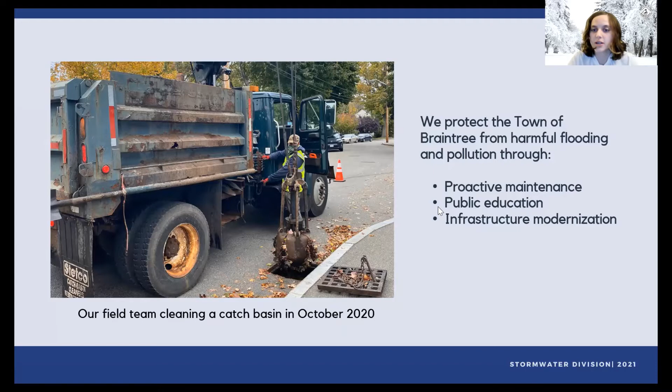So getting into our public education point, stormwater runoff contains non-point source pollution, and that's why as a division, we think a lot about pollution, not just flooding. So what is non-point source pollution? Non-point source pollution is the type of pollution that is created from everyday activities, such as walking the dog and washing your car, and all of these things can accumulate from suburban environments, urban environments, and even cropland to pollute rivers.

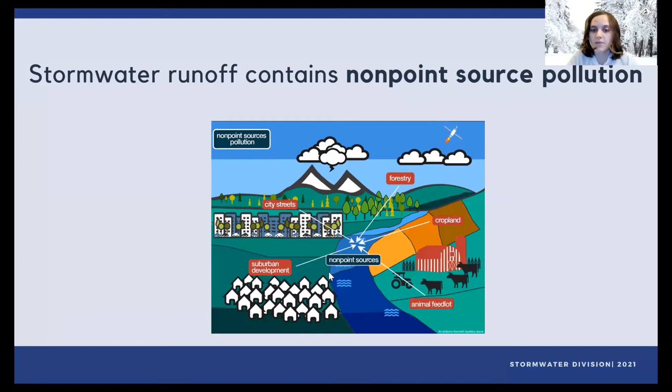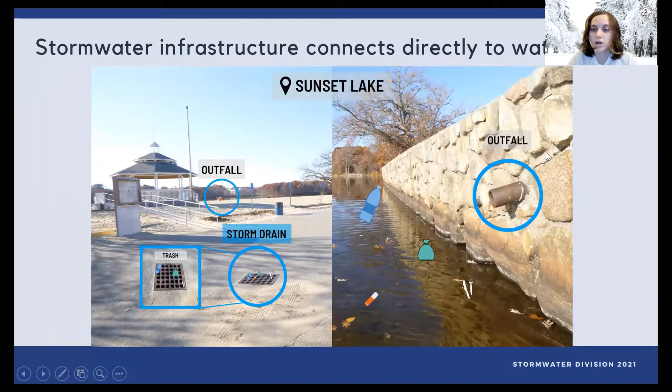So Braintree water bodies fail state water quality standards. We're definitely not alone in this. Many cities and municipalities across the state have this issue, but that's one reason why we're trying to address the stormwater runoff pollution, because it is the main reason that we're failing these standards. And that's true for the Charles River watershed, that's true all across the country, and that's why it's so important to address these issues.

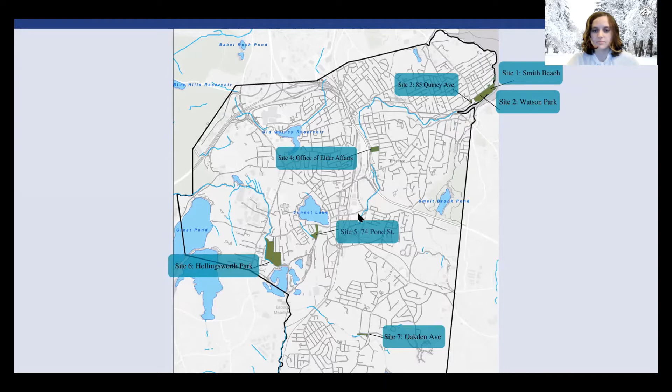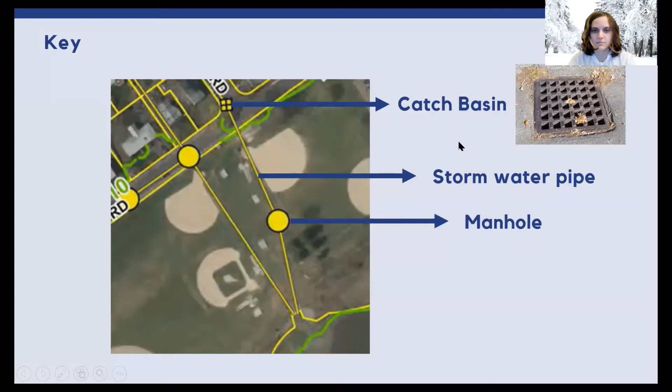So site one is Smith's Beach. And this site is a combination of the beach itself and the parking area that's across the street from the Metropolitan Yacht Club. Next slide, please. So on the map here, you see the beach itself along Edgehill Road and Vinedale Road, and the parking lot that's across the street from the Metropolitan Yacht Club.

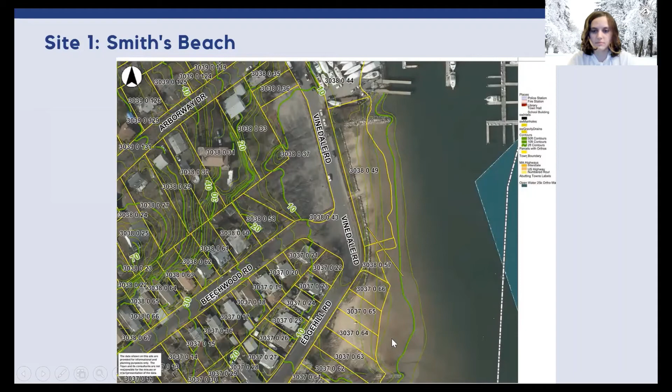If you look very carefully, you can see areas where there's some erosion into the river itself. So down at the bottom of the site, Madeline, I don't know if you can put your cursor there. That erosion is being caused by the outfall pipe that you saw in the next slide. We can go to the next slide. I could use those pictures as well. So the street drainage on Edgehill Road and on Vinedale go directly into drainage pipes that discharge onto the beach and are visible at low tide.

The idea here is to figure out a way to capture this stormwater and treat it before it enters the river, because this water is going directly into the river without treatment whatsoever. Next slide, please.

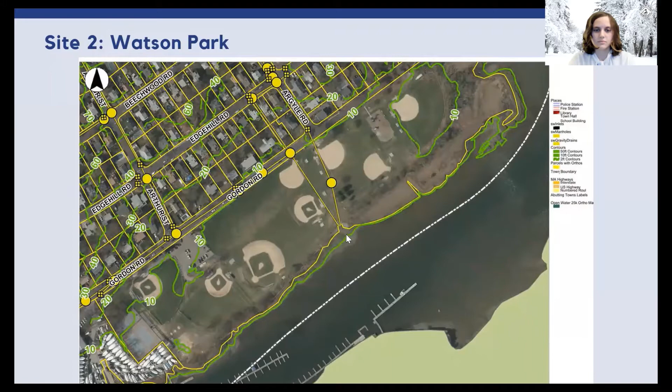So this site has 2 very large diameter pipes that go through the middle of the park, in between the ball fields, and they are part of a watershed that extends quite a ways up the hill to the north of the site. It's an almost 25-acre watershed that drains to these 2 pipes, and all of that water ends up right at the edge of the river. And if we go to the next slide, I can show you a couple of pictures of what the ends of those pipes look like.

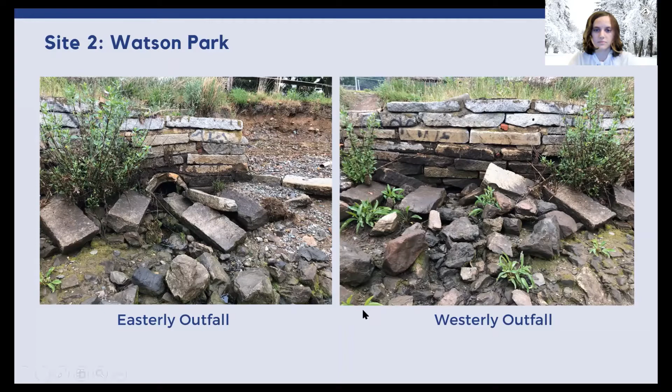Site 3 is 85 Quincy Ave. Next slide. As you see here, 85 Quincy Ave is the home of the DPW administration. Our division's offices are here. The DPW director's office is here. The engineering department is here. This building was a former branch library and has 2 stories with access on each story. So the parking lot adjacent to Gordon Road is on the high side of the site, and the parking lot in the back of the building closer to the yacht club is on the low side of the building. So there's a pretty significant grade change from the upper parking lot to the lower parking lot.

But unfortunately, there is no stormwater management of this paved area or of the roof at the present time. So the water that's generated by the pavement and the roof sheet drains across all the pavement from north to south, and then discharges across the steep slope that you see that separates this site from the yacht club itself. And then from there goes directly into the river.

There is a landscaped area on the western side of this site, which is available for a stormwater treatment best management practice. So we did do some soil testing there, and the soils do seem to be suitable for an infiltration solution, but we will see what happens with the conceptual designs when we get to that point. Next slide, please.

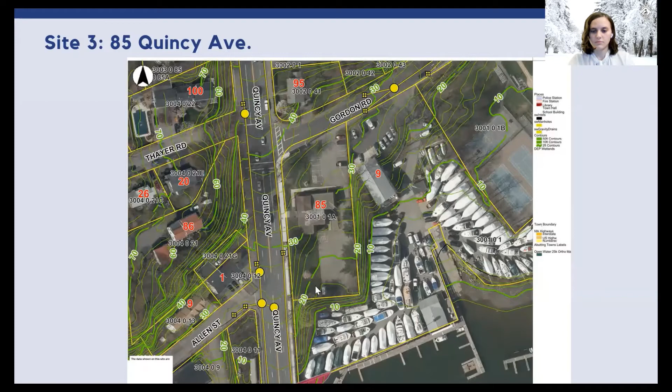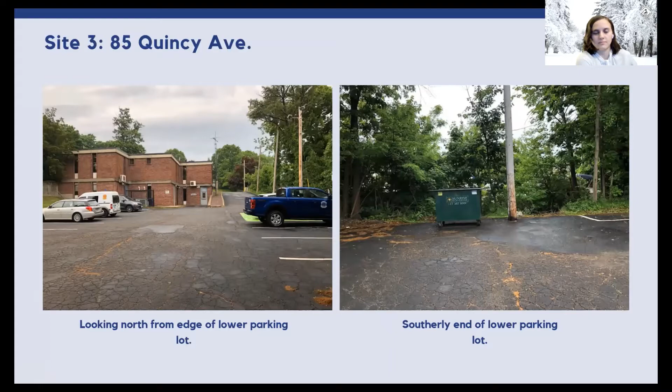The photograph on the left is looking north from the edge of the parking lot up the hill. So you can see where that grade change is on the right-hand side of the picture. The picture on the right is looking in the opposite direction. So you can see that there's a fairly steep slope there. All of the stormwater flows across the pavement and over the edge of that slope right now. Next slide.

Site number 4 is the Office of Elder Affairs on Cleveland Avenue. Next slide. On this map, you see the original building that was on the site. Since the time that this picture was taken, this is a 2019 aerial photograph, an addition was built to the building that actually encroached on the outfield of the existing ball field. So that ball field is no longer in use.

The town is planning to expand the parking lot for this facility because it does get a lot of use. And there is a conveniently located drainage line that goes through the center of the site. Again, you can see the yellow circles for drain manholes and the catch basin, and that's a drainage pipe that goes through the middle of the site.

So we have good access to the existing drainage system for a stormwater solution on this site. What you don't see on this map just off to the west is the Monatiquot River. At the bottom of the slope on the left-hand side of the site is the river itself. This drainage system that goes through the middle of the site, including some additional stormwater structures on Harrison Avenue, discharges directly to the Monatiquot. We would be intercepting this line and installing some sort of stormwater management solution in the landscaped area.

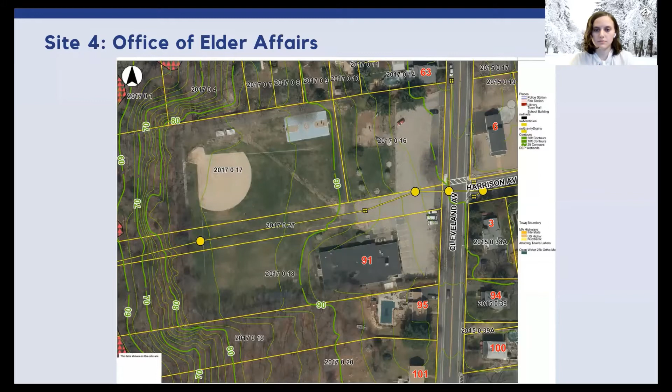These are a couple of photographs of the existing parking lot adjacent to the playground area. The upper right-hand side is a view down the center of the site where you saw that drainage pipe and a group of manholes. The grassed area on the lower right-hand side has a manhole cover in the center, which is the last structure in the line. So we may be making a connection to that manhole.

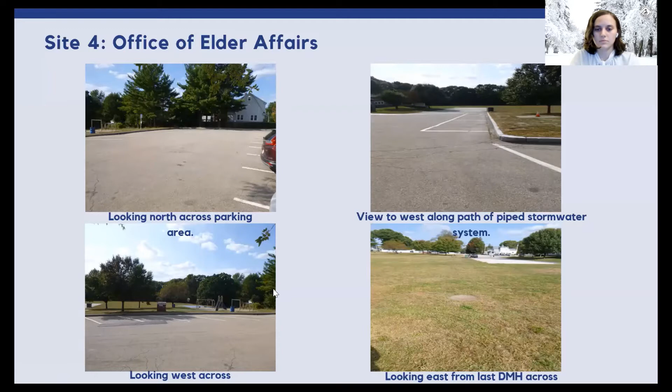Site number 5 is 74 Pond Street.

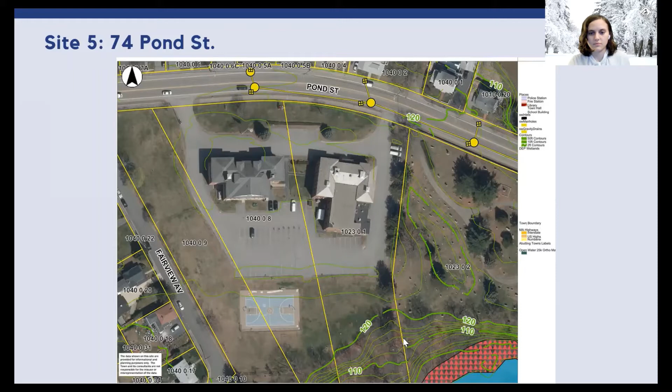Here on the left, you see the back of 74 Pond Street and the edge of the parking lot where the 2 catch basins are located. The center photograph shows the existing basketball court, and if you look carefully, there's an old swing set in the picture as well. The photograph on the right is the landscaped area that might be the location for a stormwater solution for this site.

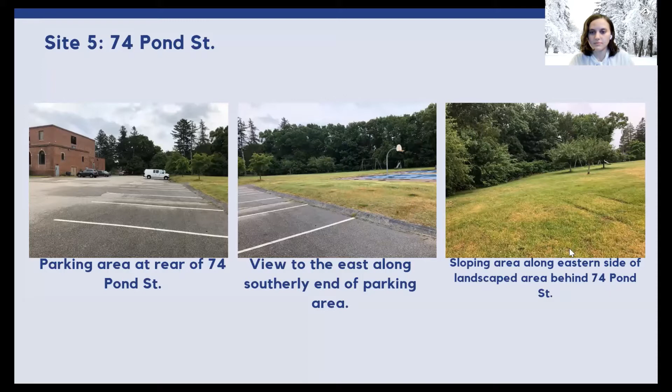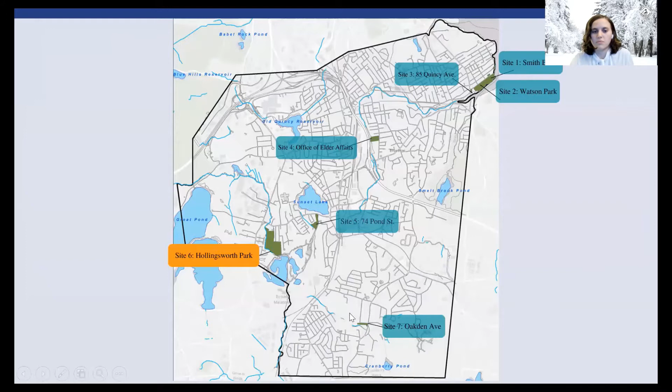Site number 6 is Hollingsworth Park, which is home to the Braintree American Little League - the other large area of baseball fields on the western side of town.

Hollingsworth Park is a long, narrow parcel with a fair amount of impervious surface because there are parking lots adjacent to most of the ball fields. But other than the tree box filter installed about a year ago near the beginning of the site, there really is no stormwater management.

The site starts out at a fairly high elevation and goes down and down as you get to the 2 lower fields at the bottom. The water from the parking lot flows down the driveway, takes an abrupt left-hand turn, and discharges onto another piece of town-owned property adjacent to the ball field - that undeveloped wooded area that most of you might have noticed if going to games at the lower 2 fields. Next slide, please.

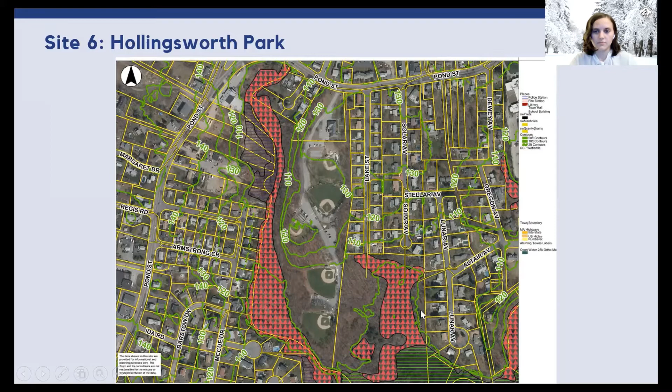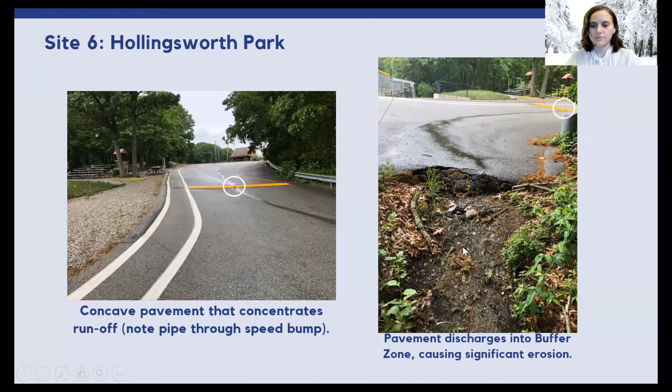The other element of this site is that there are a group of residential streets that also discharge stormwater into the same undeveloped parcel that's next to Hollingsworth Park.

Our hope is that we could come up with a solution that might collect and treat the stormwater from both the park and from the discharge point off Lake Street. I'm not sure if this is going to be possible because there is a significant wetland area on the parcel adjacent to the park. We have done a wetland delineation, so our consultant is aware of where the wetland boundary might be, and we will be working outside of the resource areas on our design solutions for this site.

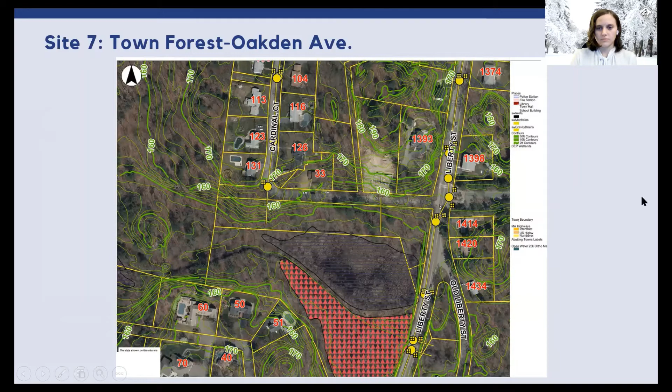That brook is a tributary to the Richardi Reservoir, which is one of our public water supply areas, which is another reason why it's a more protected area than some of these other sites.

However, both of them have a fairly long run through the slope on the portions of the site where they discharge. The idea here would be to possibly cut the pipes a bit shorter and have them discharge into some sort of green infrastructure that would allow some of the pollutants to be removed before this water ends up in Cranberry Brook.

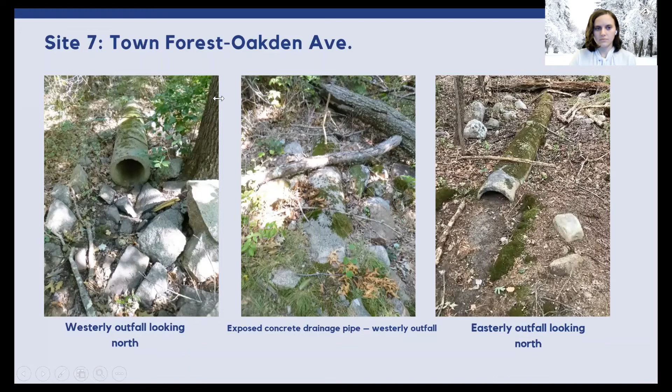So that is all 7 of the sites. As Madeline mentioned earlier, we are planning a second meeting sometime during the summer after the conceptual plans for all 7 of these sites have been prepared, so that all of you can see what the design solutions look like and comment on them.

At the moment, this project that we are funded for is a planning project. It does not include funding for construction of any of these conceptual plans.

As Madeline mentioned earlier, there is another DEP grant fund called the 319 grant, also using federal funds from the EPA, and that is primarily meant for the construction of these types of green infrastructure solutions. We're hoping to pick one or possibly more, depending on what our cost estimates end up looking like, of these sites to go forward with a 319 grant application in the future.

Once we have the conceptual plans in hand, we also would be eligible for several other grant programs. So it's something to consider, and we would love to hear what your comments are about these sites and about the program.

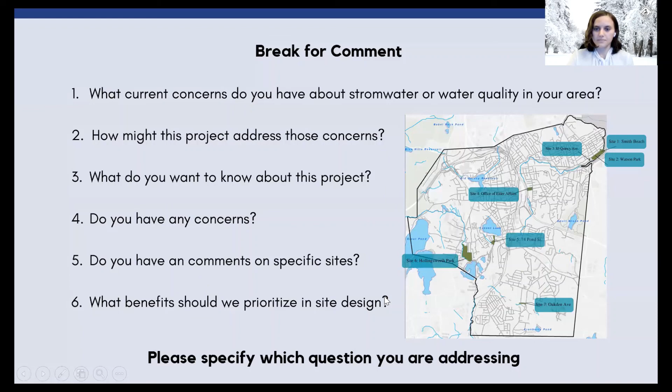Gabriel, I unfortunately was not in Braintree when that work was done. But I believe that that is within the state highway layout. So the design would have been done by MassDOT. And I'm sure there was a stormwater element to it because that rotary does generate quite a bit of stormwater because there's so much impervious surface. But as far as the specifics of the design, I do not know the answer to that. Okay, so that's the end of the questions for the moment.